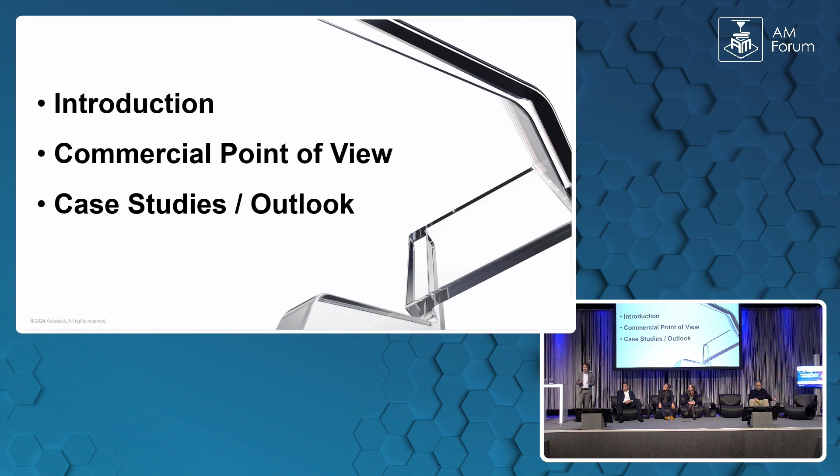Thank you for the invitation, and thank you for being on this panel. I would like to talk a little bit about platformization and the Autodesk point of view on additive. First, a high-level introduction. Then I will talk about some tales on the commercial side of things, and then I'll quickly wrap up with an outlook. I'll skip through my slides quickly because it's actually an hour presentation condensed into about 10 minutes, so apologies if it's too confusing, but I think it's a nice story and I really wanted to tell it.

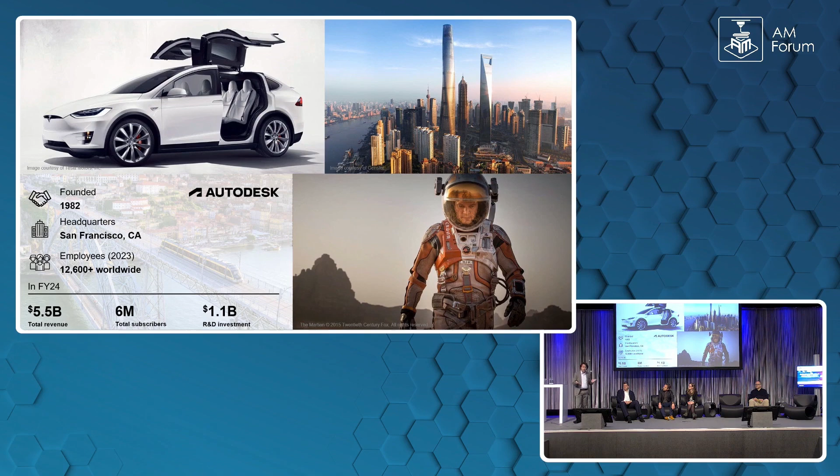I don't want to bore you, but I wanted to give a little overview of Autodesk, because the size of the company in this industry is very much underestimated. Autodesk is one of the biggest software companies on the planet. We are active a lot in mechanical design, but in many industries. For example, Alias is used for designing almost any car in the world. Revit is used for designing almost any skyscraper in the world. And Maya and Max are used for making almost any movie and video game in the world. We make about $5.5 billion in revenue with about 12,000 people worldwide.

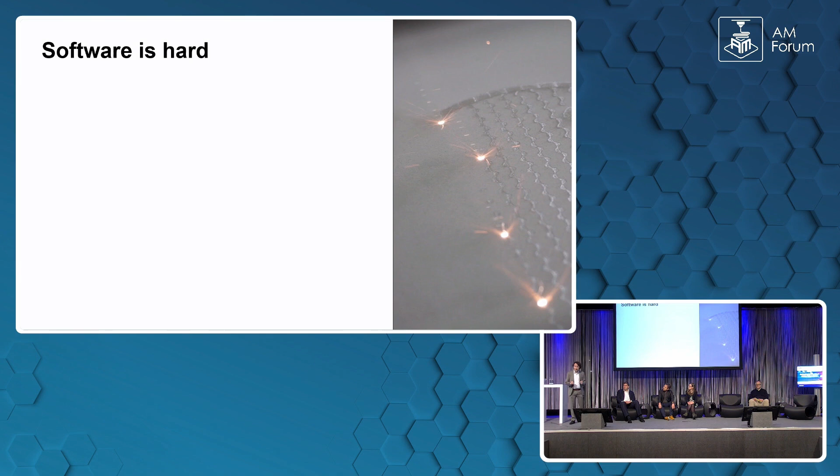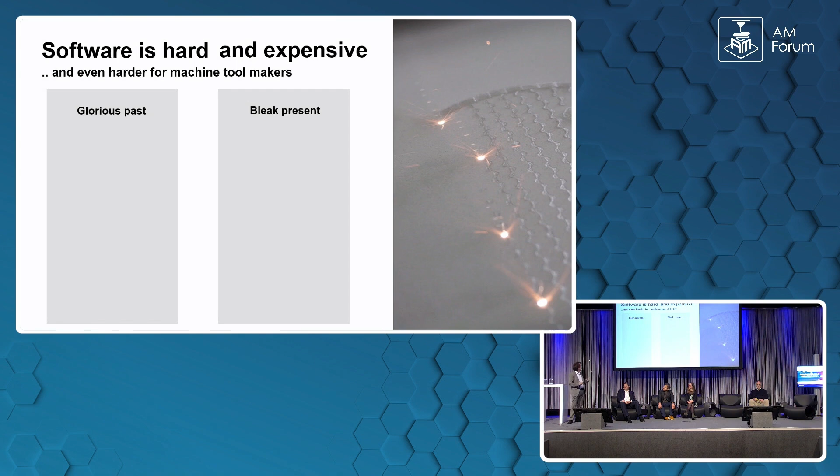As part of a 1,000-person engineering organization that works on one software product, we know software is really hard. And it's not only hard, it's also really expensive if you look at it. It's even harder for machine vendors who usually don't have a core software business model. It's an add-on, and we see this again and again and again.

If you look at the industry, there is something I call the glorious past - this was like five years ago - and the bleak present. In the past we had zero interest rates; today we have non-zero interest rates. I've seen so many pitches of startups doing additive where the TAM is manufacturing, and if you have gazillions of dollars of potential revenue, then what you invest in software doesn't matter, because it will always pay off with those numbers.

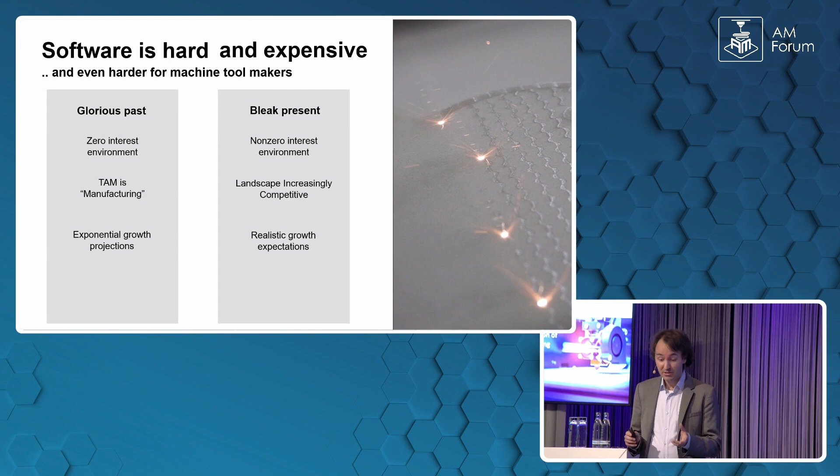Today the landscape is increasingly competitive, and there wasn't an explosion because hardware is also expensive. But if TAM is manufacturing, you always have exponential growth projections, which have gone away in the industry, and everybody has a headache from the party, I can say. If you were at AMAC, that was very prevalent. And what happened is...

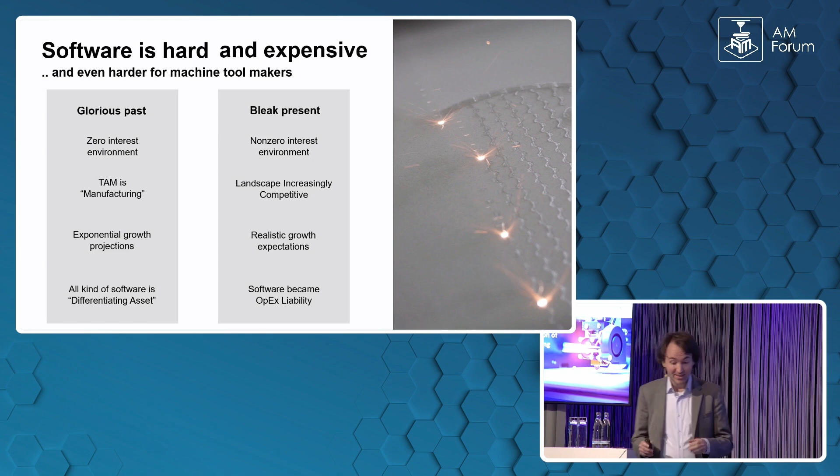We saw that as a software vendor dealing with hardware vendors, features they had 5 years ago were a differentiating asset, even if every other vendor did the same thing. That has gone away. So what's happening, especially for hardware vendors, is software is becoming an OpEx liability because you have to pay software engineers developing standard functionality that doesn't differentiate you.

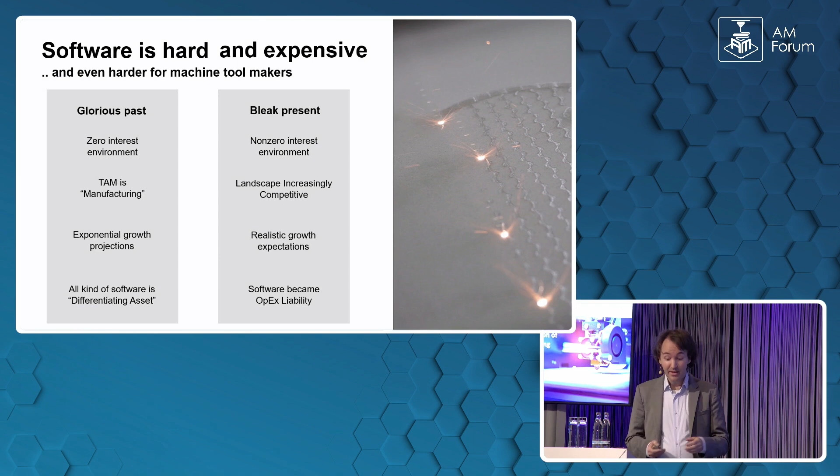I don't want to say which company that is, but everybody looks similar. If you look at the mobile phone industry, there's huge differentiation because a multinational software company was adjacent to the industry and created a software stack that, besides Apple, every phone vendor could use as a base platform to differentiate their core specialty.

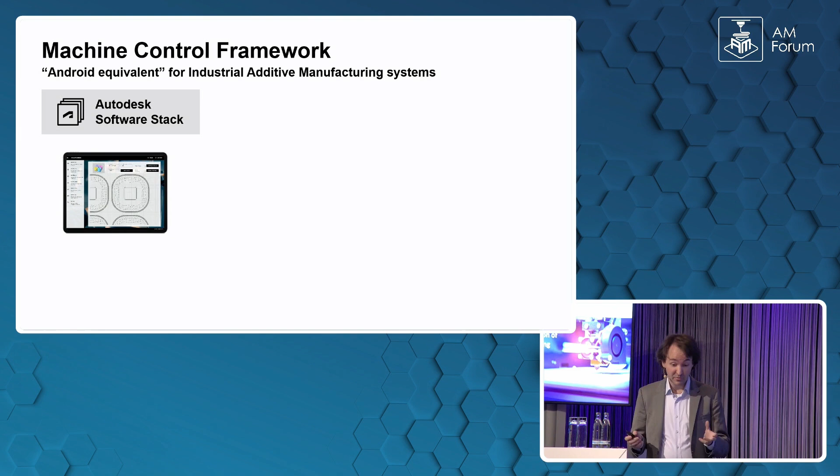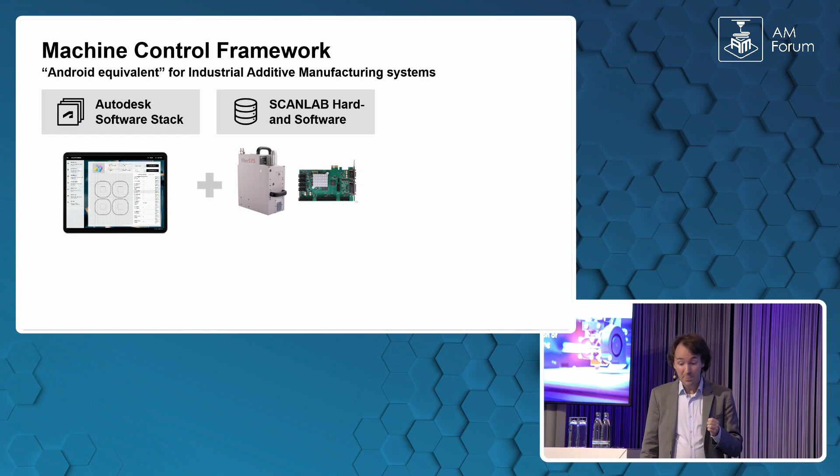What we want to build is an Android equivalent for industrial additive manufacturing systems, which we call the Autodesk Machine Control Framework. The idea is we take the Autodesk software stack, combine it with component manufacturers like ScanLab, who I think are sitting here in the audience and are very helpful, but also other vendors like PLC vendors, like B&R Automation, who we work a lot with.

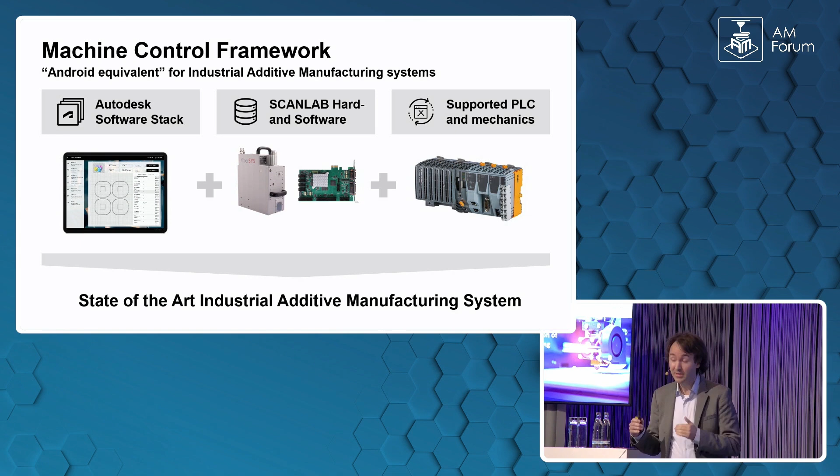We combine all that together so you can take off-the-shelf components, hardware and software, and just focus your development on what differentiates you, like your mechanics and so on, maybe in a CAD system that we also provide, and create the software stack.

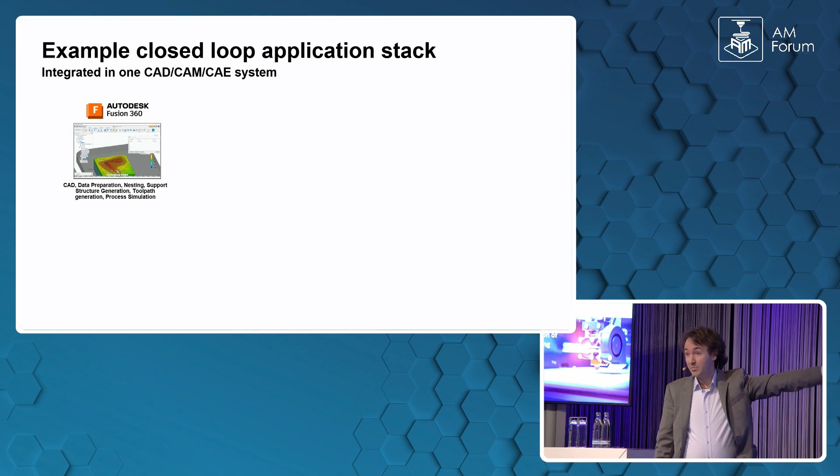I'll just show you how this would operate. If you use our core product, Autodesk Fusion, it's only $2,000, and you get a CAD system, data preparation, nesting, support structure generation, toolpath generation, process simulation - everything you need end to end. From the software side, you can just buy it online for $2,000.

Then you take our software stack to control the machines, and that does all the process control, non-real-time control on a PC, going to the individual off-the-shelf components, like the ScanLab components, like a B&R PLC, and so on, and then you can print parts.

But you don't only print parts - you can take off-the-shelf components and do data acquisition and process monitoring with it. You can just buy that, get a quote and buy that today. You push this back and the system pushes back to the CAD system.

We have process simulation, so for example, you can get a full thermal temperature history of your process and overlay it with your simulated thermal history. Then you make decisions on it, and what decisions you make is the differentiating IP - not that this is possible, this is just an engineering task.

Then you do a closed loop, so you can either change the toolpath, change the orientation, change anything upfront. You can do it online, non-real-time on a layer-by-layer basis, or real-time like a PID control on the power and so on. ScanLab has amazing off-the-shelf solutions, like the open interface extension that allows you to regulate for temperature instead of power, for example. This is just an example.

What we deliver is a platform where you can choose what you want, either on the data prep side, the machine control side, whatever. Just take it at a very low cost that millions of users can access, and then build your ecosystem.

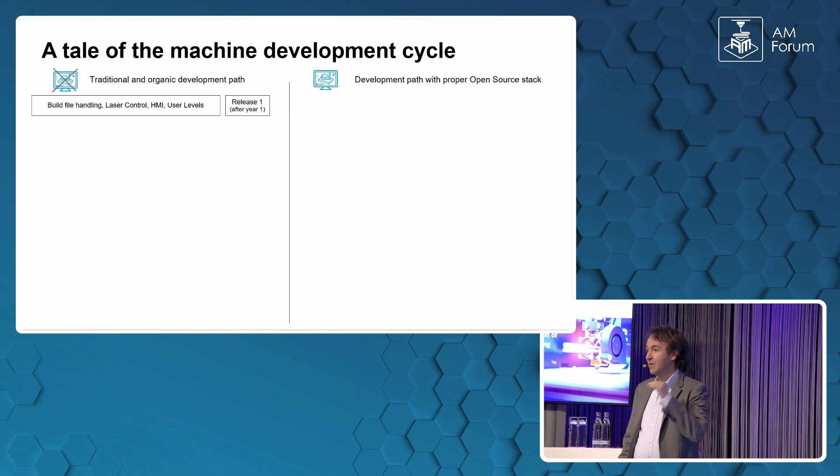From a commercial point of view, what usually happens is a machine vendor starts up, either as a startup or an incubation board in a large OEM, and they have 3 PLC programmers on their team, and one of them knows C# by accident or statistics, and that's the guy who does the software implementation. In the first year, they ship the first machine, it prints parts, everybody's happy, they get Series A investment, scale up, and then the second year comes. In the second year, something unforeseeable happens, which is a second machine is sold.

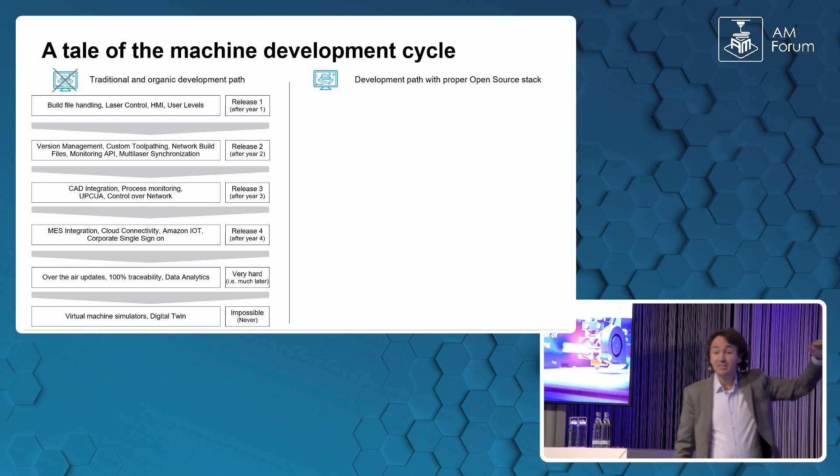I've never seen a machine vendor whose second machine is the same as the first, so immediately you run into version management issues, and all the things software brings with it. At some point you find out there are CAD companies, MES companies, and so on, and you've cut off so many development paths that you're lost. You either start from scratch, like big companies can do, or you have a real problem implementing new features. And the problem is, you've already invested tens of developer years in your system, and you can't change it anymore. That's the trap a lot of people run into.

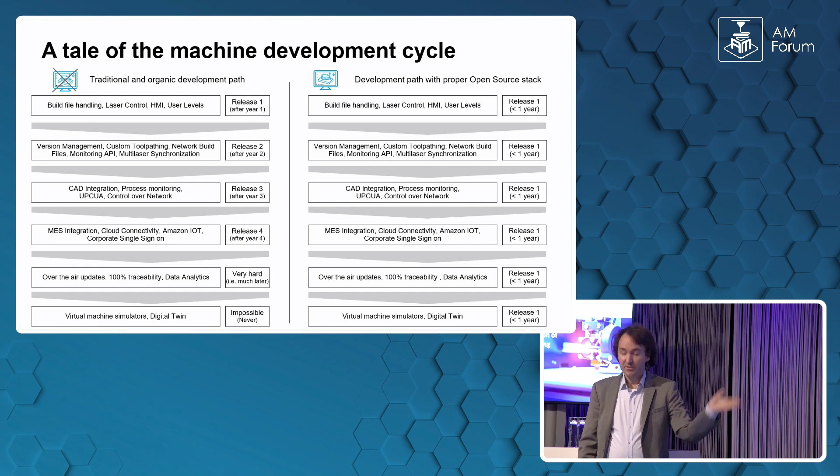Our pitch is, from the platform side, all the things on this slide you get for $2,000. That's a really nice value proposition, especially looking at the productivity boost. All the things I mentioned are easily 32 developer years you could waste easily on this, and you still won't get there, because you'll just organically grow it.

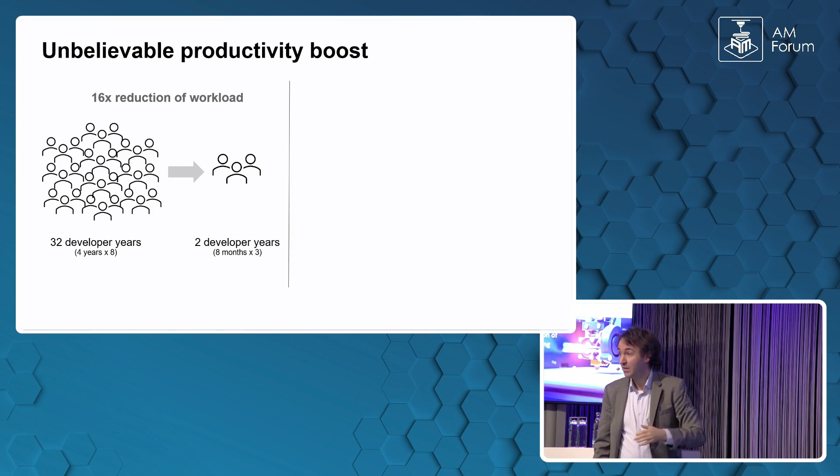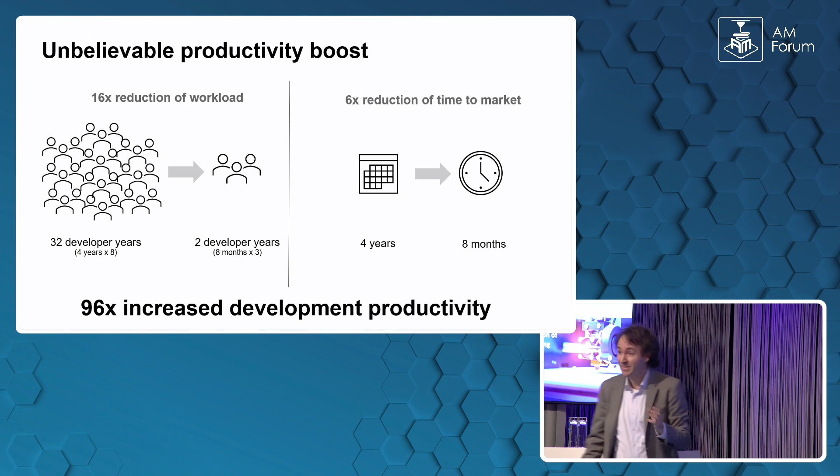The idea is, and we've proven this with first vendors, that you can cut this down to 2 developer years very easily, because you have 3 developers for 8 months. That's not only developer years, which is millions of dollars saved, it's also cutting down time to market since you only need 8 months to build the software. And if you multiply that, which my bosses in San Francisco like a lot, it's almost 100x. I don't know if that's scientifically accurate, but it's almost 100.

Because this touches the core of a machine vendor, we don't build a business model on it. We went to the 3MF consortium with the Linux Foundation and open sourced the whole stack, everything that's not Fusion 360, all the machine control stuff. That's really powerful because even though it's open source, everybody can adopt it. It's BSD licensed, and if you know the details of license management, that doesn't mean your machine needs to be open source. It means you can take it and build a closed, proprietary system on top of it that differentiates you. We just don't have to deal with all of that.

I don't have enough time, only 2 minutes left, to go through all of this. I have a long list of reasons why this is really important—otherwise you're lost if you make yourself dependent on a third-party vendor for your crown jewels. That's very compelling when we talk to machine vendors. And there are other things only a company like Autodesk has. I always say we probably don't know how to develop software, but we've certainly learned how not to develop software, and all of that knowledge went into the system.

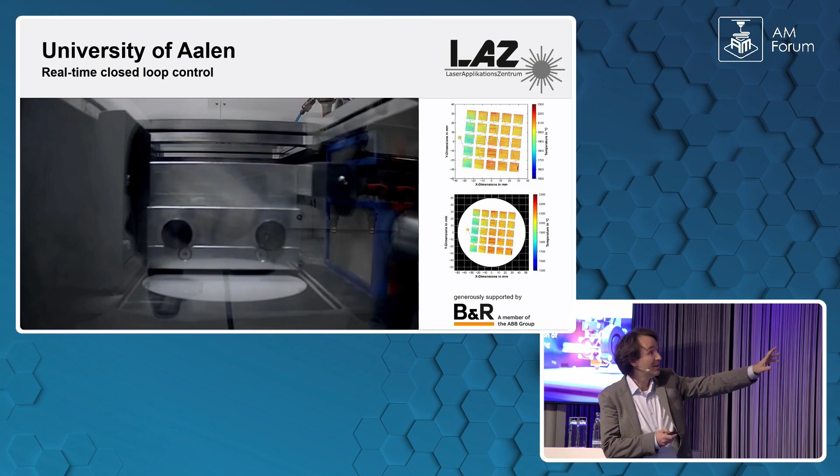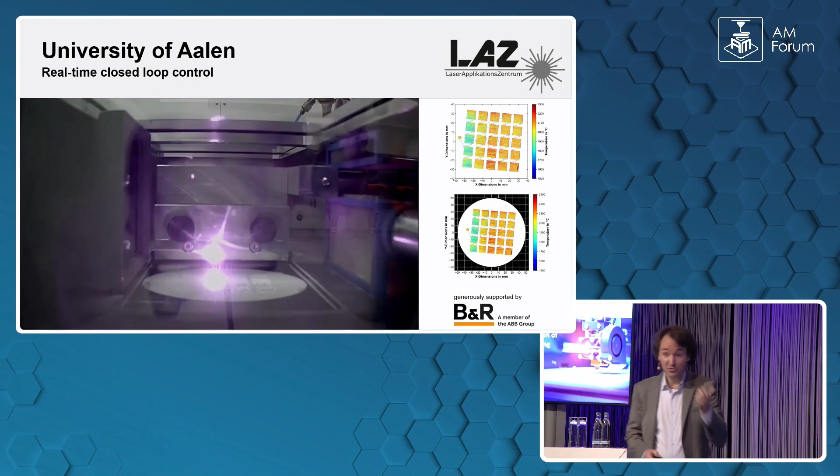I have a few case studies. I first want to talk about the academic ones because they're really great. This is LaserApplikationsZentrum in Aalen—they had about 2 people develop this system, a closed-loop, real-time controlled system. I only have a minute left so I can't go into details, but it's really amazing: it does melt pool monitoring. You can even see in the image that they messed up because they printed on a screw, and you see it in the thermal history. They not only measure what's happening in the melt pool, they also do closed-loop control with the ScanLab components.

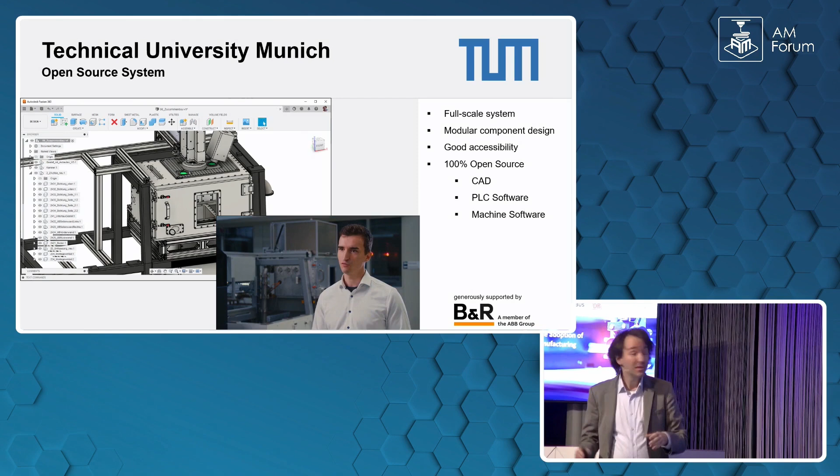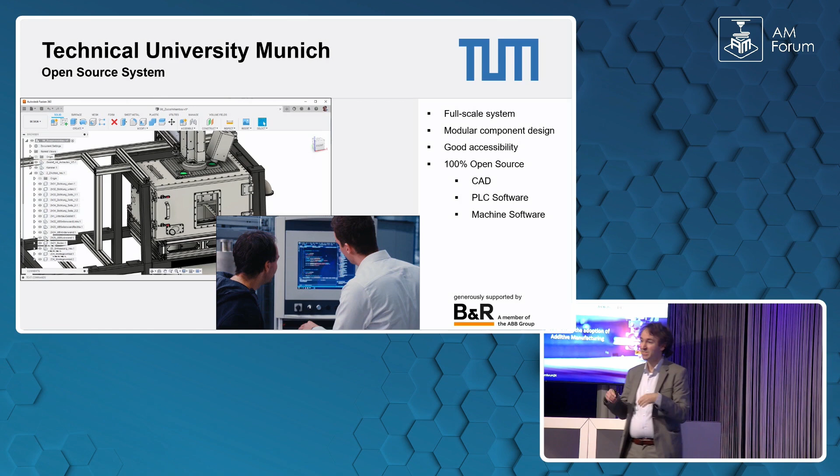With the Technical University of Munich we went even further. We designed a fully open system where TU Munich designed the CAD in a system they trust. B&R Automation was very helpful in designing an open source PLC software, and we made the machine software. We'll release it, I think in the fall, on our website so everybody can use it for research purposes—not for commercial use, very research focused. The idea is to create something similar to what RepRap did for FDM printers, so that innovation can move much quicker.

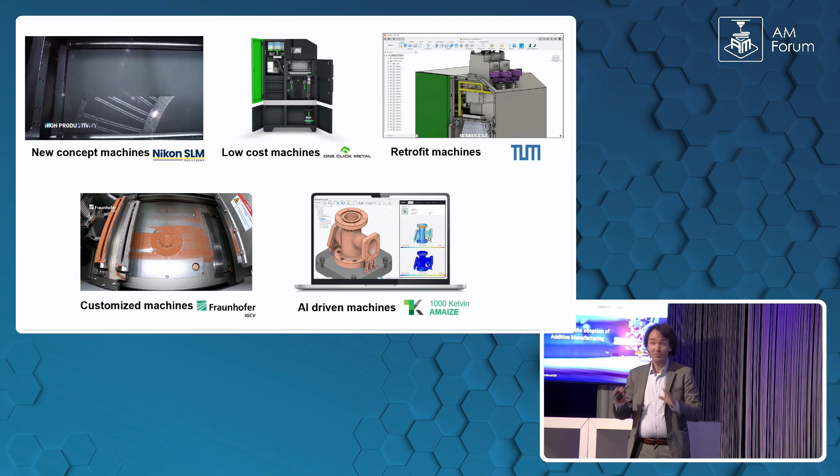If I had 30 more minutes, I think this will just disrupt a lot of things in the industry. One thing is new machine concepts will come. I worked with a startup, fortunately acquired by Nikon SLM Solutions, called Additive, which built a 5-laser, multi-laser moving source machine for 1x1 meter parts.

It's really amazing that they could implement the machine software with 1.5 developers in 8 months. Low-cost machines will come because the cost per part are too high. There will be a split between the high-end ones, which are ultra-large, and the low-cost machines.

One Click Metal is my favorite customer. I think Garrett is in the audience. They are amazing, they will change a lot of things with a mass market approach. They have their own machine software stack, but our platform approach is that when you have expertise in an area, you can use yours. We just offer an end-to-end solution that you can pick what you want. They sell a machine for $90,000 that makes really amazing parts, I can tell you. We own one, and it's really amazing.

Then there are retrofit machines. You could buy a cheap machine from One Click Metal, and that's what we did - we bought standard ScanLab components and retrofitted it to be a closed-loop controlled machine for a few thousand dollars more, with really the highest end components that ScanLab offers. That is really exciting because you can do beam shaping, closed-loop control, dual laser synchronization, all kinds of things for a very, very competitive price. We work a lot on the high end, on the tool path with multi-material.

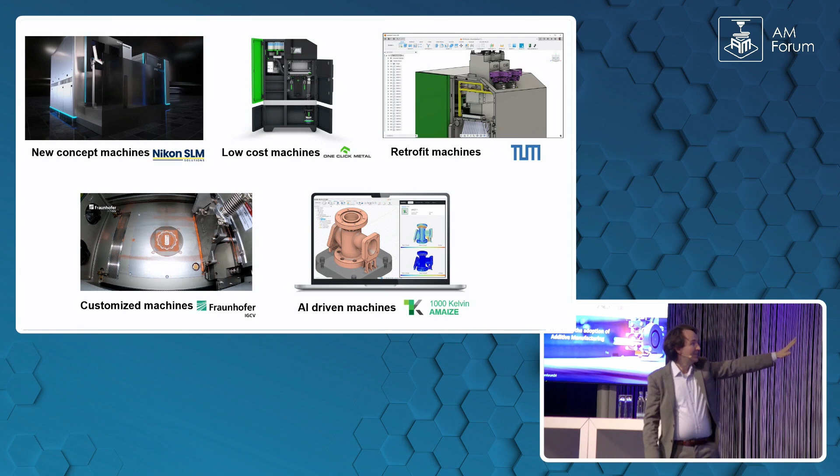I think Christian Seidel is also in the audience. They did an amazing thing at Fraunhofer with multi-material printing. That's what Formnext is all about. And that is just the beginning, because we just - I think Omar is also in the audience.

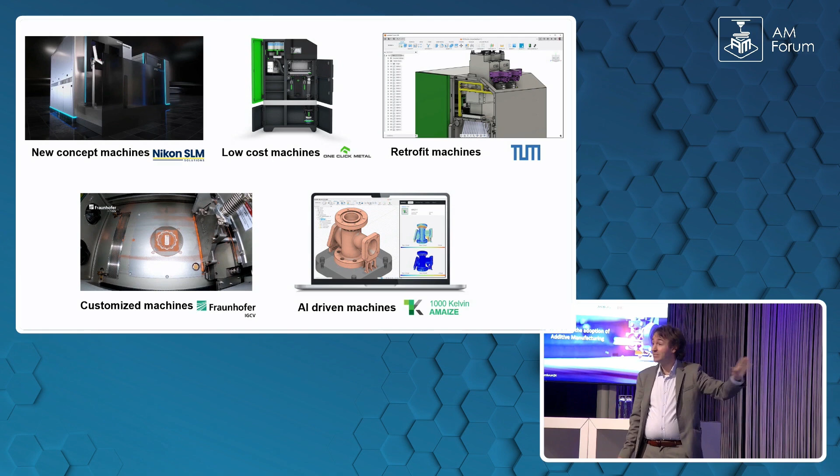If you have all of this and have full control over what's happening on the machine, you can really go the AI-driven way. And AMAIZE is really amazing. I was a bit skeptical in the beginning, but when I looked more into it, it's just the most credible solution - how would I say that - maybe next to David's, but David is polymer. The most credible solution in the AM space that we have seen of AI so far.

So thank you, and I'm sorry for taking 2 minutes too long.

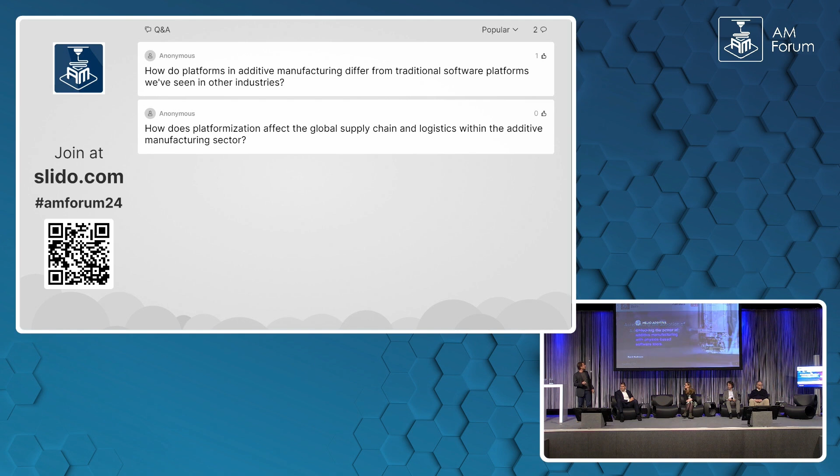Good afternoon, my name is David Hartmann. I'm the CEO and founder of Helio Additive. What I want to talk to you about today is unlocking the power of additive manufacturing with physics-based software tools. Coincidentally, that is also the mission of our company - unlocking the power of additive manufacturing with physics-based software tools. Why that particular mission?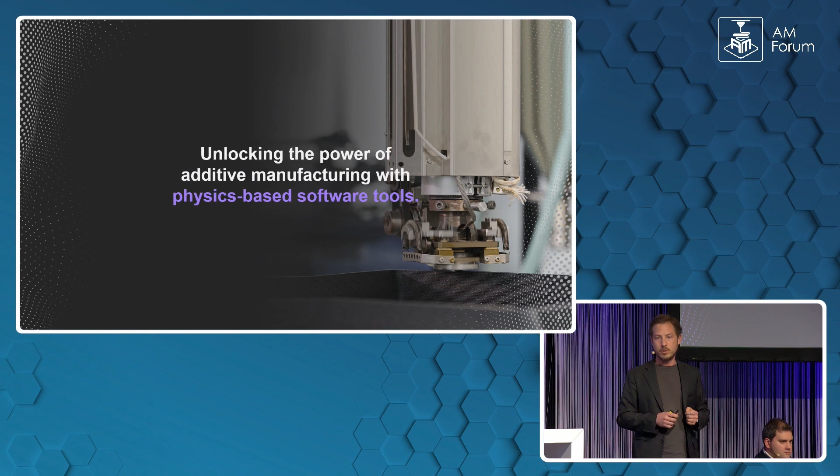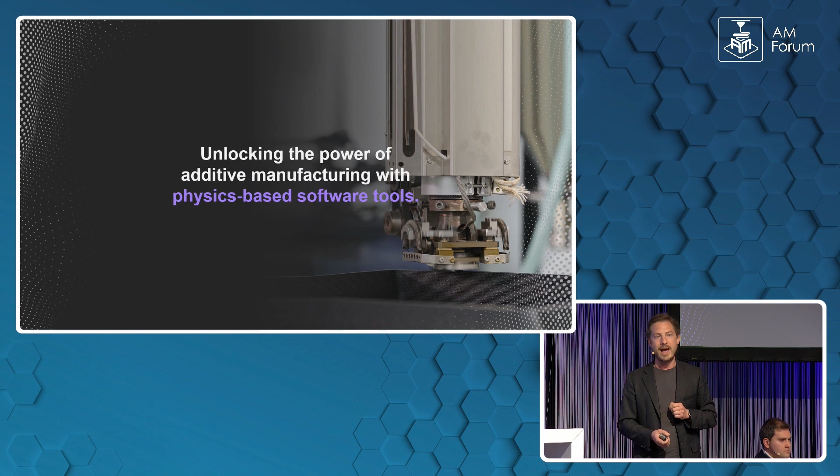In the polymer world, you can think of the world around us - everything flows, it's just a question of time and temperature, which is basically the foundation. This concept is the foundation of rheology. If we understand how things flow, why they flow, and if we understand the physics behind material deposition, then we can start to really unlock this gap in potential between what could be and what is.

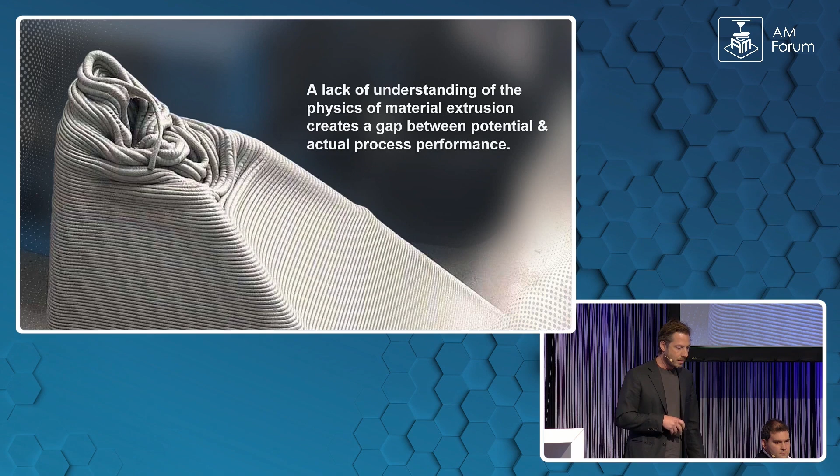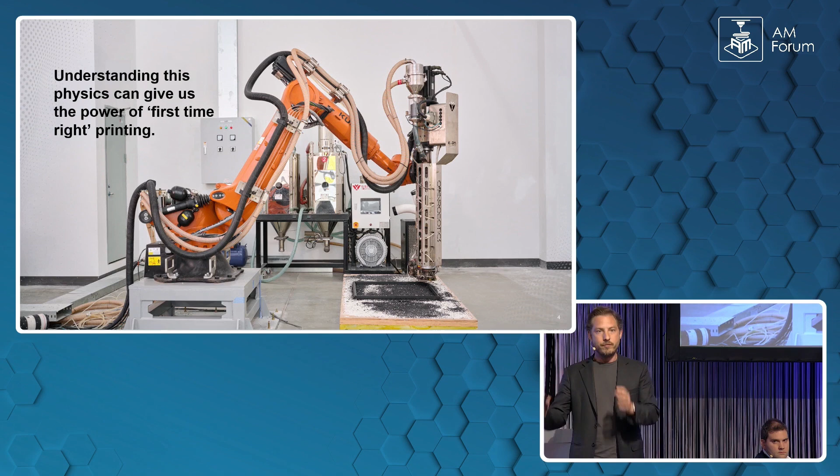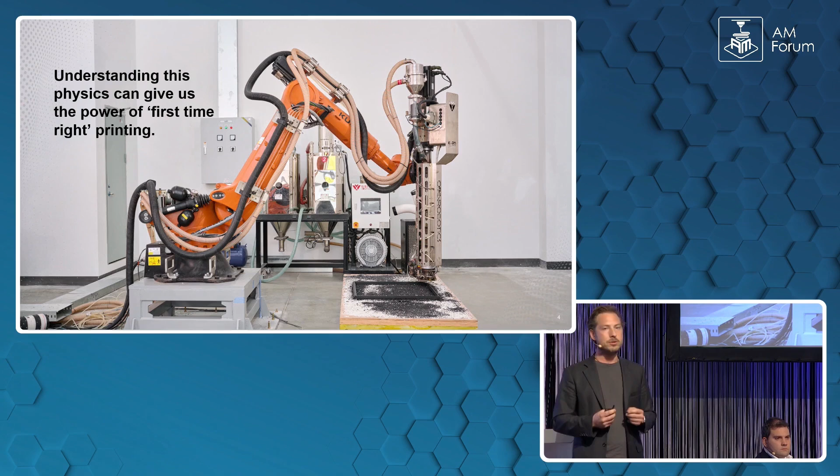So when we understand that, what can we do? This is a buzz phrase we use in the industry, but I can't think of a better way to say it: when we master that physics, we can unlock first-time-right printing, meaning we can go from a true digital representation of an object to a true and perfect enough physical existing object. That's the holy grail for us, if we don't have to do a huge amount of net shape manipulation or post-processing at the end, but can go straight to a physical copy of the digital object.

In this picture, this is one of the robot printing platforms we work with, but we also work with desktop consumer and desktop industrial. For us, it's a whole range of material extrusion.

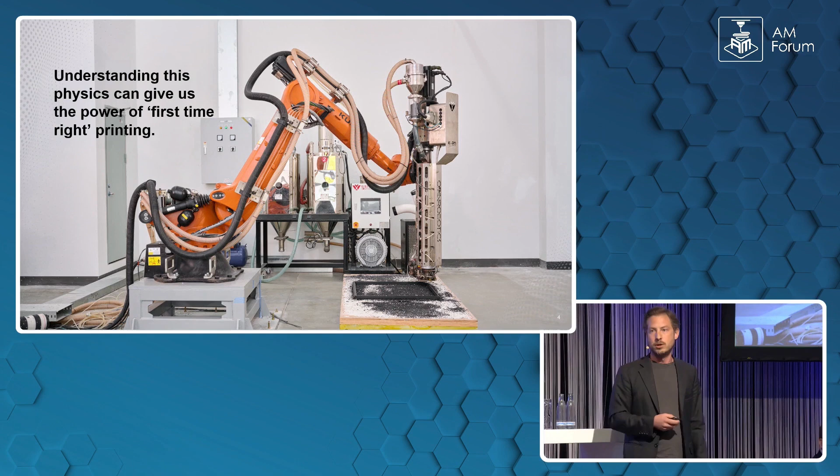So how can we achieve this first-time-right and many other benefits? Let me introduce Dragon, our no-code cloud-based process optimization tool. Dragon includes three components: extremely fast cloud-based first-principle physics-based thermal simulation, a set of physics models and material libraries to translate that thermal simulation data into something real, and finally a set of optimization algorithms to close that loop and output something worthwhile that makes first-time-right printing achievable.

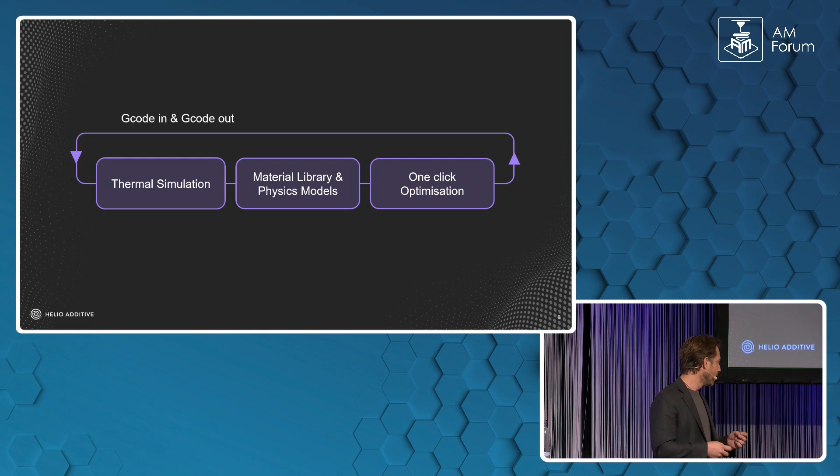We do this in three steps. We pull in toolpathing information from whatever slicer or toolpath preparation tool you're using, whether it's Fusion 360 or other tools, and then pass that through no-code thermal simulation tools, physics models, and the optimizer, and get out an updated toolpath that allows a whole lot of benefits once you understand the physics of what's going on with the material.

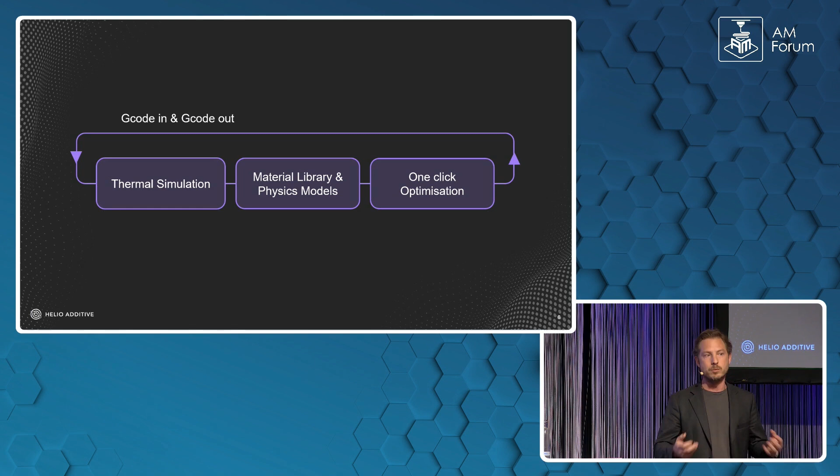For me, when I think about where this fits into the big picture, on one hand we have toolpathing. We talk a lot to toolpathing companies, and I'm in awe of the mathematics behind kinematic robot simulations and toolpathing in general—it's its own art form, very exciting and powerful. We don't do that side of things, but we believe there's a complementary side, a right brain needed to really deliver on this promise. That right brain is the physics-based, first-principle process optimization we're offering.

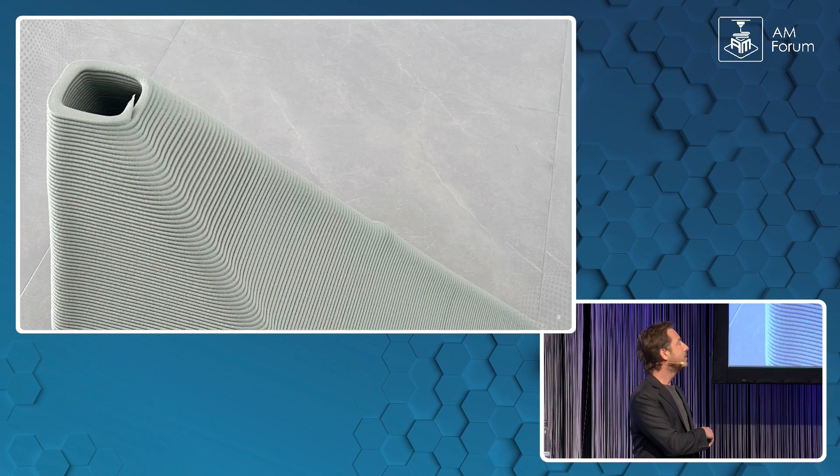Once you have both together, real magic can happen and we can do a lot of cool stuff. We can go from something like this to something like this without having to actually print a part and make process parameter adjustments through trial and error. We can do all that immediately in digital form.

We're currently working with our first customers, and it's exciting to get feedback from real-world parts, where people say, okay, can you try this? Then we pass them an optimization, and all of a sudden they're printing it without any trouble. They get excited like kids in a candy shop and say, oh, we've also got this object—can you do this one for us as well? I say, yeah, no problem.

Our system integrates into the toolpathing software stack those companies are using, whether it's a Rhino Grasshopper stack or other commercial platforms available, then effectively pulls that toolpathing data out into the cloud and sends back an optimized version.

The result so far has been, most importantly, first-time-right, because if it doesn't print, what's the point? But we also see consistent speed increases—this depends on how aggressive the original settings were, but in a recent part we had a 30% speed increase, and as parts get more complex, we can push that further. We also get consistently better part performance, whether it's less warping, less deformation, or tensile strength, as layer bonding improves and stress relaxation improves as well.

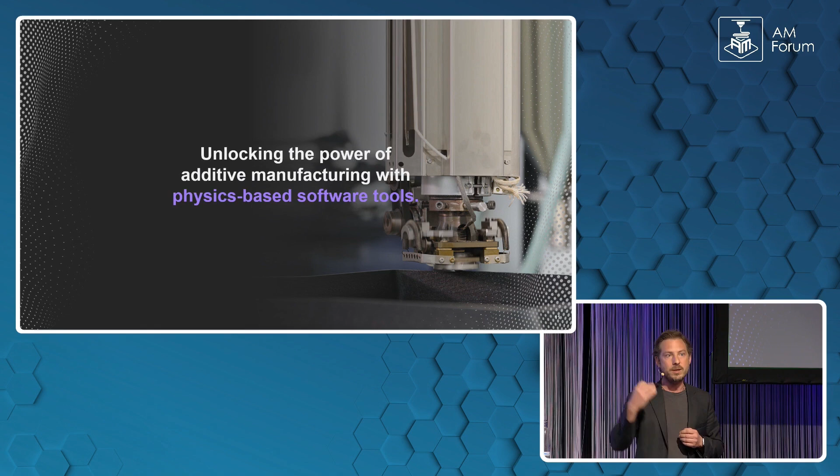To close off, I'd like to end where I started and leave you with one thought: when you think about unlocking the gap between where 3D printing could be and where it is today, think about how everything in our world flows as a function of temperature and time. When we understand the physics behind what's going on with the material, we can make real magic happen. Thank you very much.

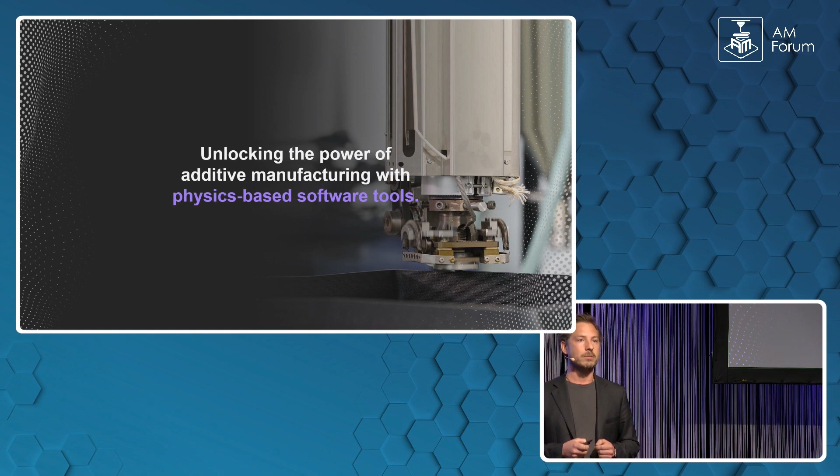Thanks, David. There you go, Phoebe. So, Phoebe, the stage is yours. I'm very excited to hear about circularity. I think this is a great concept that you're going to introduce to us today.

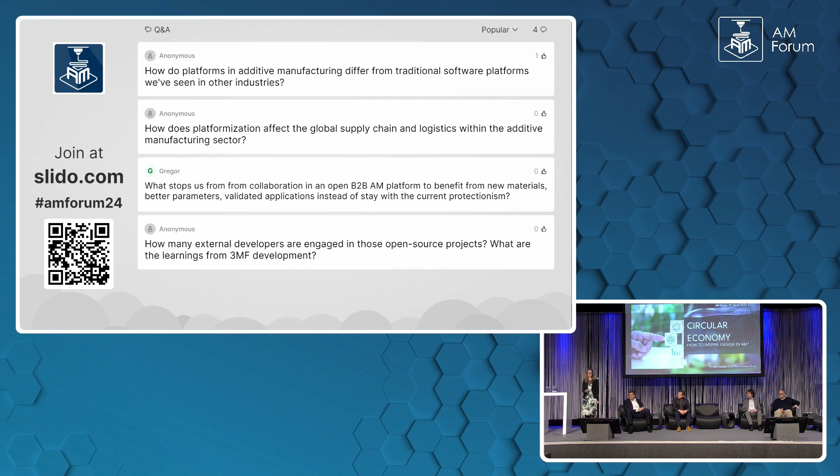Can you all hear me clearly? Good. Thank you very much, Stefan, for the introduction, and thank you very much to the organisers for inviting me here today. It's a privilege to be at a real event with real 3D printing people, and it's also a privilege to be surrounded by 3D printing and AM experts when I'm myself external to that sector.

I'd like to start my session with a quick poll. I'm hoping this will come up somewhere miraculously with the Slido. Brilliant. So if you can grab your phones, I would like you to key in a word or keyword that you most associate with circular economy. Hopefully this will materialize into a word cloud.

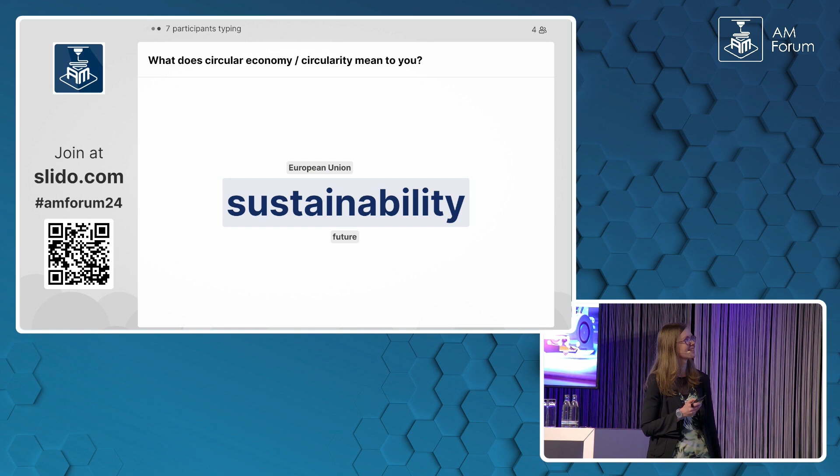Okay, interesting - European Union, sustainability. Keep it coming, keep it coming. I know it's after lunch, the lunch looked pretty good. Cradle to grave, okay - reusability, carbon dioxide, costs, efficiency, closed cycle.

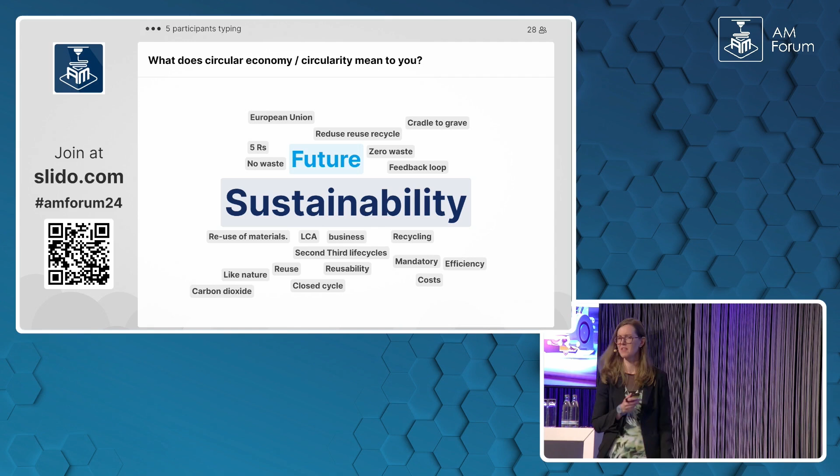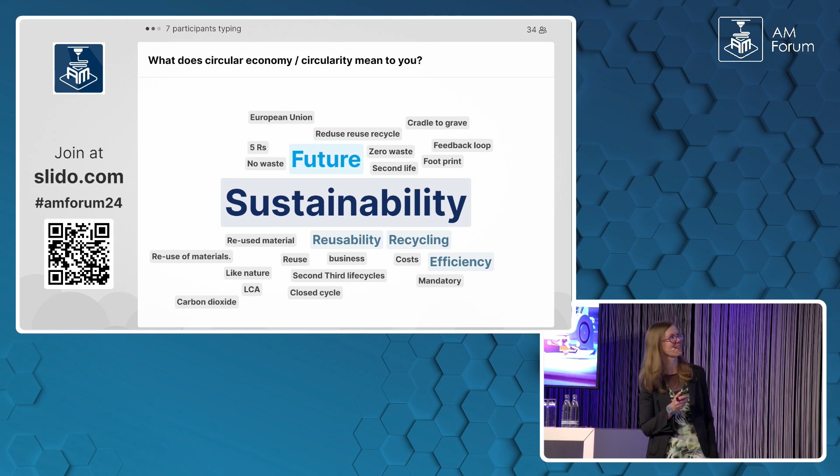5 R's, thank you for whoever contributed that. We will come to those - in fact they've increased since it's more R's now. LCA, yeah, life cycle assessment. Reuse of materials, brilliant. Anyway, keep that coming, but I will have to move on to my next slides. Hopefully I will encompass some of these terms in my short talk. I'm glad to see that you seem to be interpreting this at a pretty advanced level.

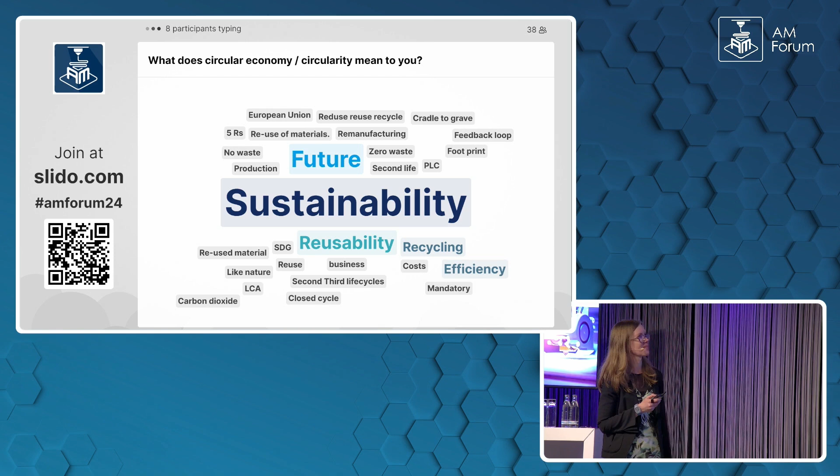There are many, many definitions of circular economy out there, but I'm choosing one which is very much recognized today by the Ellen MacArthur Foundation. It's pretty much one of the thought leaders and toolboxes on circular economy. This is not the full definition, it's an excerpt. I like the way they mention 'driven by design' - that's actually my bold. I'd like you all to see these 3 principles of circular economy and think, well, how could AM integrate them more or at all?

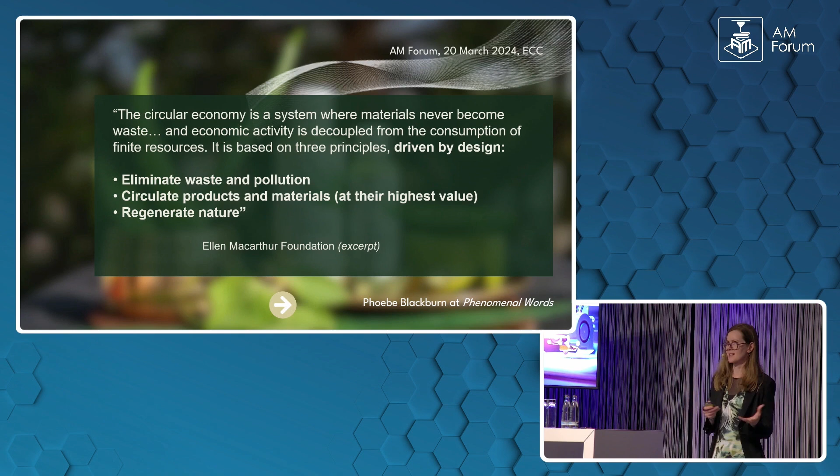I think many of you are already thinking about these topics, materials, CO2, etc., as you mentioned in the Slido. But how could you do this even more? Circulate products and materials, keep them in the economy, keep them in their cycles. Eliminate waste and pollution, obviously, ideally. And regenerate nature - I think for many of us that's still a little bit utopian, but ideally that is what we need to be doing.

I live in Berlin, and for me this is the beginning of a transition to circularity - it's the NochMall in Berlin. It's about 8 kilometers from here in Reinickendorf. Do pay it a visit if you have a bit longer in Berlin. And it's also funny, German humor - yes, plenty of German humor in Berlin, really. Nochmal in German means 'again,' so it's like the 'again mall'.

And it's actually an inspiring example of circularity, also because it's a fairly innovative business model. It's a waste management company which is going into retail - that doesn't happen so often. In effect, BSR, the Berliner Stadtreinigung, the waste management company, they're basically taking all this stuff that Berliners don't want and selling it back to Berliners. So it's local, with less transport costs - an interesting model for you to think about.

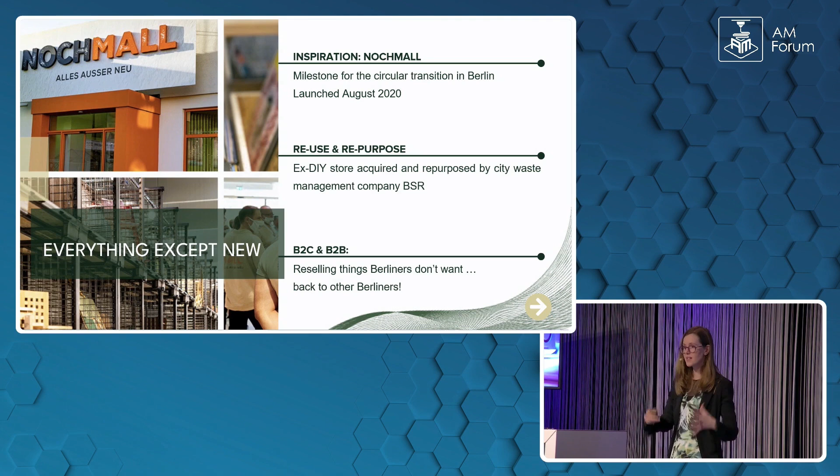And that strapline is 'alles außer neu' - everything except new. Now, of course, we need new materials, new objects, products, new prototypes, etc. Of course we do. But we also need very much to reuse the stuff that we have, the products we have, the materials that we have already in the economy. And we're just not doing that enough today.

So, a bit more theory. Today we basically are in a linear economy, as we call it - the take, make, waste model. It's a simplified diagram, but effectively we're extracting resources on the left, and we're making components and products. We're selling them, we're using them, but unfortunately not for very long - and that's to ignore packaging, which is often used for literally a few seconds. And that all ends up generally in industrial waste or household waste. It's a huge loss of value, not to mention resources in general.

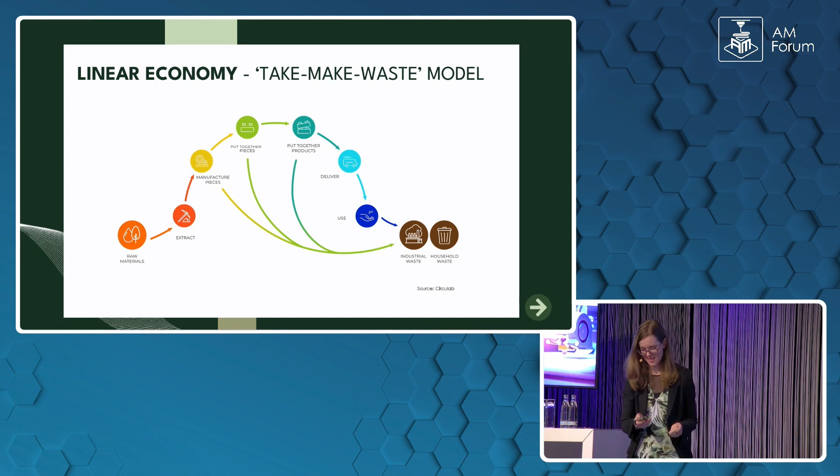And as a result, we're having fewer and fewer primary materials. As you know, it's harder and harder to get hold of them. And more secondary materials, waste, which is often not being turned into secondary materials enough. So e-waste, which is a massive stream, it's one of the fastest growing waste streams in the world. Between 50 and 60 million tons are produced every year.

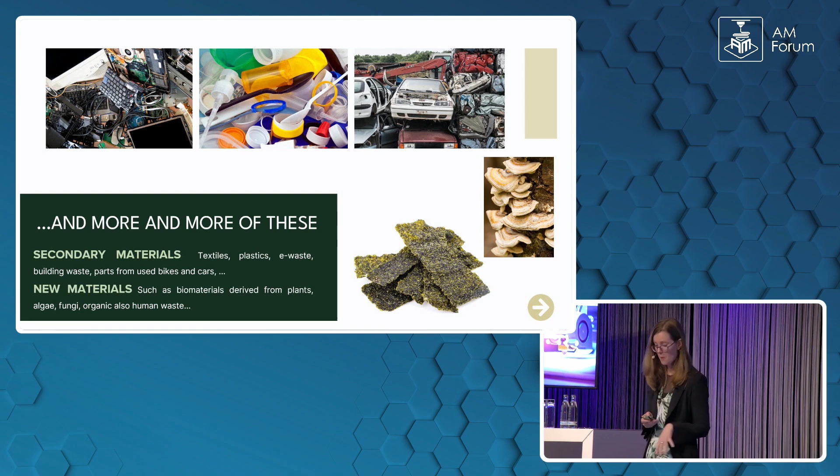That was in 2022. How could we use these better? And how could AM perhaps try and capitalize on some of those materials instead of having to go and get them from far away? And we are, however, developing more and more new materials, very exciting stuff going on all over, from plants, algae, fungi, even human waste materials, which I won't go into too much after lunch.

So we need to transit to a circular model, a remodel, if you like. So one of you mentioned the 5 R's. So it's repurposing, refurbishing, remanufacturing, refusing. Recycling, actually, is a last resort because you've got a much greater loss of value. So you really want to be more at the bottom of that circle.

So how could additive manufacturing be much more present in the bottom of this circle? It's a question to you. The title of my talk was in the form of a question. It also made sense because we're closer to the discussion. Something for you to really think about this afternoon, in the rest of the forum.

On the left, we have regeneration. That's harping back to the definition I gave you earlier. Ideally, we need to be regenerating resources that we then need to make products and services. And I've shaded that out, the extract raw materials. I mean, we're going to keep needing new materials, of course, but we need to use a lot less of them.

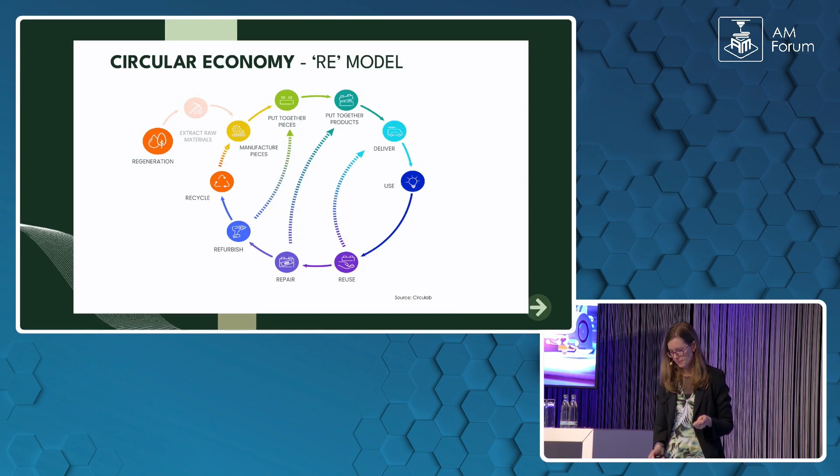Awareness of circularity is growing. It's slow. Actually, Germany was the first country in the 90s to legislate on circular economy. Back then, it was very much a focus on recycling. And as I showed you, that is actually really a last recourse. Yeah, but since then, that's evolved, and we're much more looking at eco-design upstream rather than downstream.

Now, every January, some of you may have heard of these, we have the Circularity Gap Report. They come out measuring the global economy, and so all the kind of flows of resources coming into the economy and going out again. I'm afraid it's a bit depressing reading because effectively the global economy is only pretty much 7% circular. So there's kind of a lot of margin of progress there. But however, what you measure, you make visible. So slowly, we are much more aware that we need to go more circular and that we are wasting a huge amount of materials, which just doesn't make business sense. It doesn't make environmental sense. It doesn't make sense in any way.

Yeah, and we need to move away from inbuilt obsolescence. I think some of you mentioned obsolescence earlier, also this morning in the opening talk. So we've got these new metrics, which are slowly being developed. They're not perfect, but they're perfectible. At least they exist.

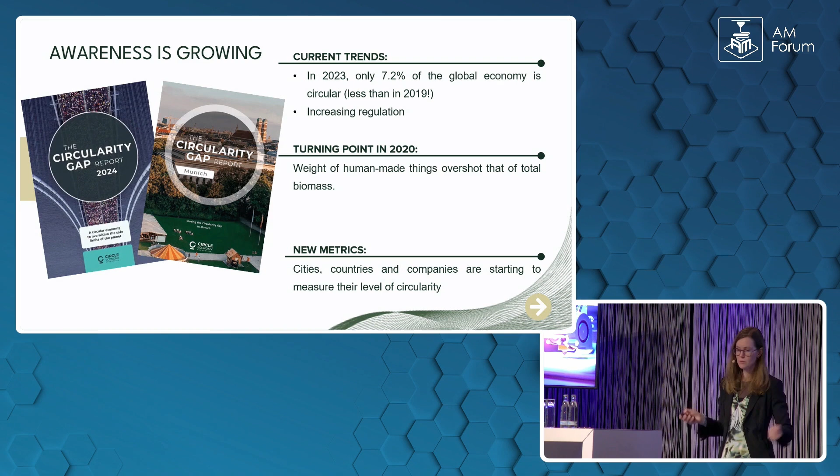And cities, countries are measuring their circularity. Munich and Stuttgart, they recently launched their Circularity Gap Reports. Munich last November, I was there for the inauguration, for the launch, really interesting. And companies are doing this. Now, for you, this is really interesting because companies are having to show circularity. There's a directive that's coming, the CSRD directive, where the biggest European companies this year are going to have to start measuring their circularity and reporting on it next year. So this is all happening, and this is a huge opportunity, I think, for AM.

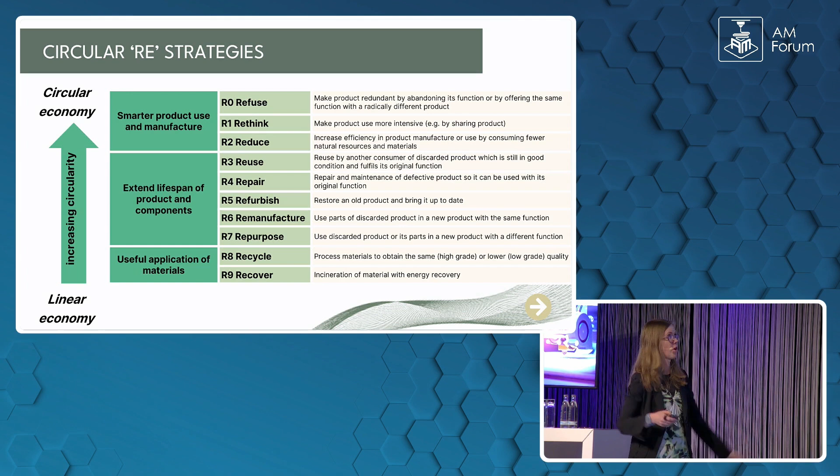So this is a bit more detail about the different strategies. On the right, I don't have time to go into detail, obviously, in 10 minutes, but where could AM fit in more here than it already does? Open question, for discussion later.

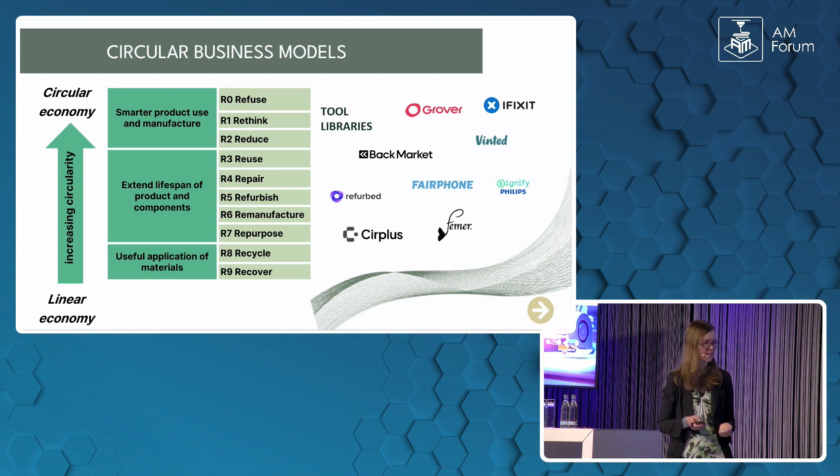A few examples I selected. As I said, I'm external to the world of AM, as you can probably tell. But this one I found interesting on mobility: it's the Refactory by Renault, the French car manufacturer. They had to close down a plant 4 years ago because it wasn't economic anymore, and they turned it into a refactory. The French do like to use English for the name of their company. Basically, they're reconditioning cars.

It's a training site, a whole ecosystem around circular mobility. Really amazing, it certainly inspires me a great deal. And they're using, of course, 3D — they're using AM for unavailable parts. Something really to look at closely.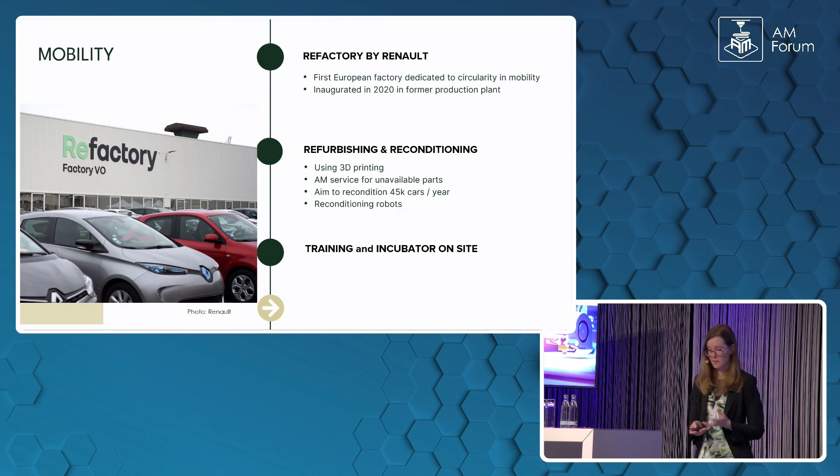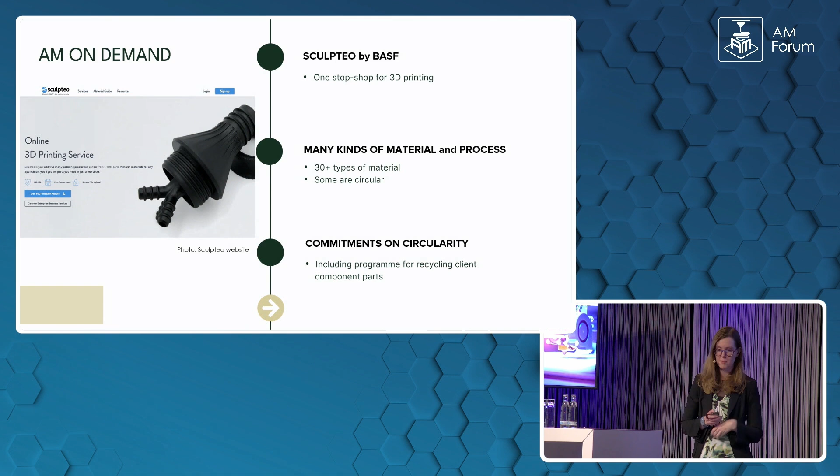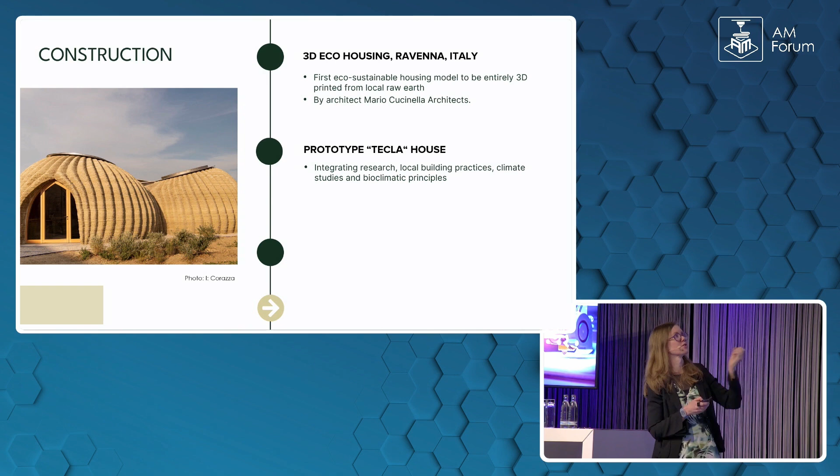And I see my time running out. Construction — I know this sector is not so well represented here, but what's really interesting is that they're using local materials, local raw earth in Italy, and they're printing a house using this material and local building practices. So it's sort of global with local.

I must finish, thank you for your patience, and I hope you followed me. Circularity and AM, I see that as a really symbiotic relationship — they can each benefit from each other. AM can certainly help circularity to really happen, to make it more feasible. And I think for AM, circularity is just a swathe of opportunities. So thank you for your patience.

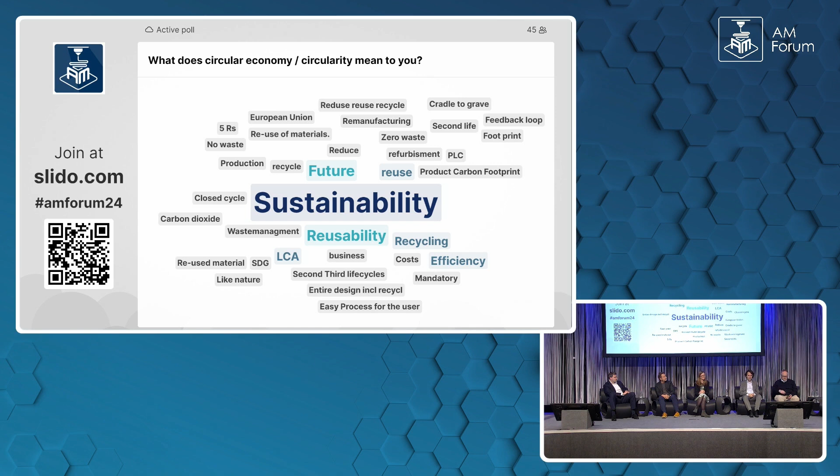We have seen 3 very different concepts now: platformization, physics-based software, and circularity. We deliberately said, let's look at 3 different concepts and technologies and investigate how they can help the AM community and, most important, the customer to create more value with it. Now, from your very practical experience, working as a consultant day-to-day with important customers asking themselves how we can make use of this whole stuff — it'd be interesting to get some insights from your day-to-day work.

Maybe you can comment — thank you, Oster, for having me here. Our clients usually, especially in the AM business, like to grow a sustainable business, not one where their stock value is plummeting, as in the example we've seen. So it's a business where we grow double-digit, and this is typically, compared to other industries, a unique setting. And this is the AM industry and the AM spirit that needs to drive that further.

However, if we look at the market data, not everybody can make a profitable business from that double-digit growth. And it's all of these hurdles that we've heard today — be it platform, be it software, be it the things that appear to be little but then in the end make the parts fail. It's the sustainable business and the circular economy, all the new challenges that our clients are currently facing. And of course, we at Roland Berger try to help them as much as possible to get over these hurdles.

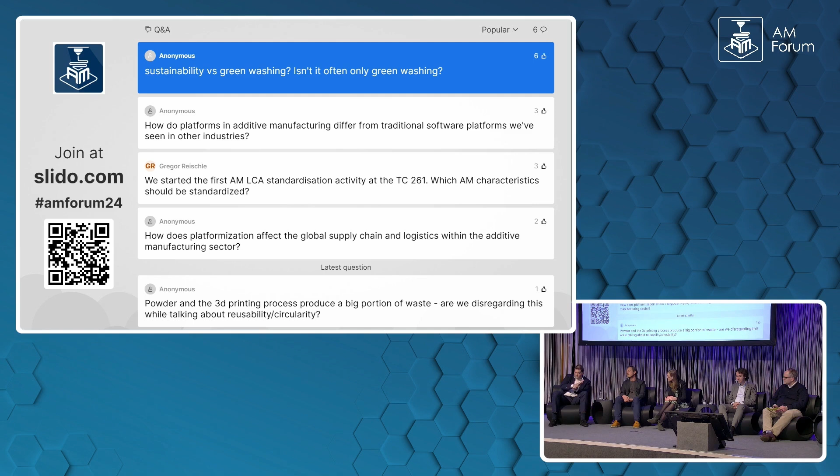Yeah, so I can jump on this. From our clients, it depends on the industry that you're in. Of course, some of the industries are quite fast forward, and there's a cycle. Some of the industries already pay a premium - if your printed products, if your delivered goods have a better CO2 footprint, they pay money for that. Certain industries don't care at all yet, but at some point in time they might also change that. And in some industries, if you're not more sustainable, you will simply be out of business. This is then not greenwashing anymore, but it has an economical, let's say, perspective to that. And I think additive manufacturing as an industry is digital. We can do better in terms of putting the prices of CO2 and how much is in there, and we see that it is improving, especially in the last two years.

We've gotten a lot better, and it's also with the development, with the software that really brings and accelerates that here to make it better.

Maybe to add to that, because I think it's a topic that touches all of us. A few years ago, when we started Helio, I got in touch with the father of the triple bottom line concept, John Elkington, who we'd worked with in the past. I said, John, we're working on this, I think it will really help 3D printing scale, and that's a good thing from a sustainability perspective. And he said, are you really sure that 3D printing is itself good from a sustainability standpoint? I was pretty defensive about it, and I said, what do you mean? He said, well, I'm not saying it's not, but can you prove to me that it is?

I think we have two lenses here. One is the lens of, can we reduce powder waste, can we use green energy for what is effectively an expensive oven, which is what the 3D printing process is. But then there's the other lens, which I think is way more powerful, which is how do we disrupt traditional manufacturing and all the waste that's involved there. I think it's up to us as an industry to focus more on the second.

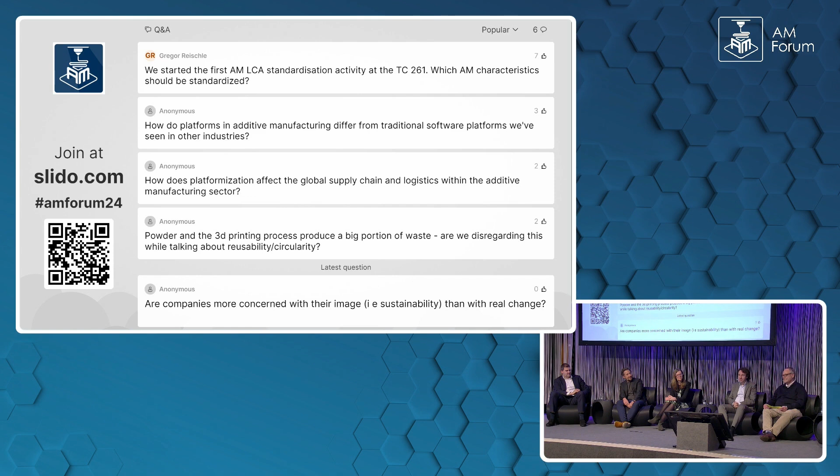Traditional software platforms is interesting. It depends what you mean with traditional software platforms, or what you mean with other industries. If you look at other manufacturing industries, I would say additive is pretty good. If you look at subtractive, the state is really bad. Autodesk recently invested in CloudNC, a cloud automation platform with AI, and their pitch, which made me really crumble, is let's make subtractive manufacturing work as good as additive manufacturing. That's their startup pitch. What they mean, of course, is that subtractive is a lot more manual, there's a lot less digitization, and additive is not so bad in that sense from a platformization perspective, even if we don't think about it. We have other problems from scale and from maturity and all those kinds of things, but from digitization it's not so much.

If you think of other industries like the phone industry, you're just light years behind in terms of scale, in terms of resources that went into it, in terms of all kinds of other things. So it depends a lot on the context, I would say.

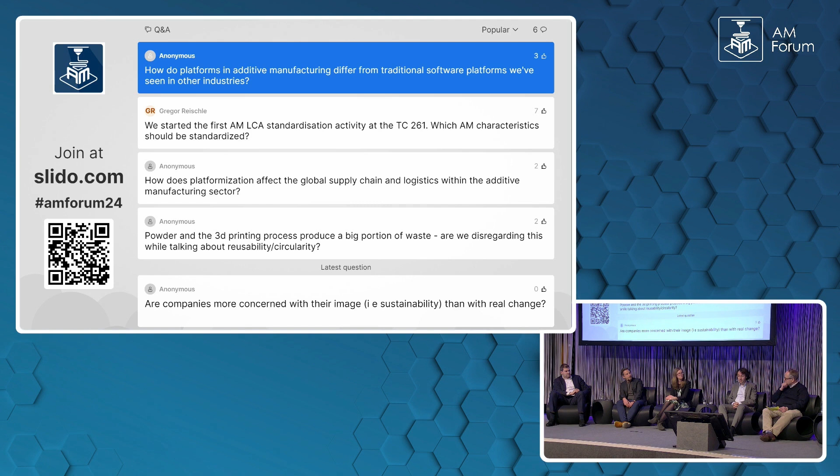And the other one, global supply chains - I don't know, it's too early to say. This is an aspect that comes from a software platform, goes into an online parts platform. We have examples sitting here, in the first row, yes. But I think it's also too early. It's all a maturity thing, and you really need to get insight into the process. And the insight into the process cannot be what layer you're printing. I really appreciate the OPC standardization of the VDMA, but if you want to do a really digital twin, you need to get much deeper in the process. And that is only slightly happening with the commercial machine vendors, and it needs to go a far way until a digital twin will tell you anything if the part is actually flyable or whatever. So maybe you should ask in the first row how that's going.

Do you feel that there's enough collaboration in the industry, maybe coming from the hardware vendors, because they were the first ones to really pick it up in the industry? Or should there be more openness?

But it's all a business decision. If you only sell 10 machines, it's very difficult. The business model needs to work, and for that you need scale, and for scale you need the business model. So it's a lot of hen and egg problem. Everybody was so happy about hearing aids 10 years ago, and everybody thought that we would have hearing aids every 3 months, and we didn't.